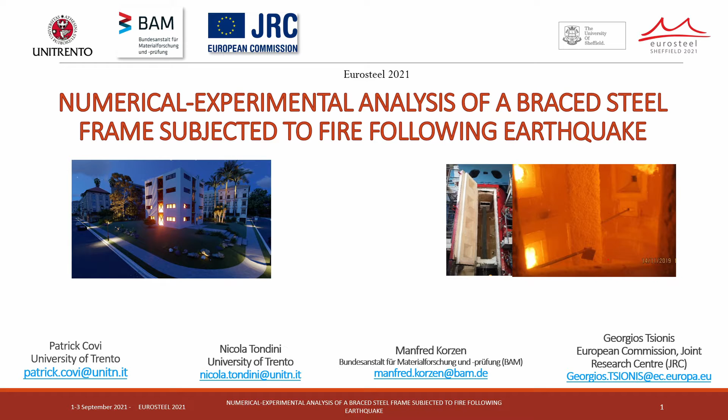In this presentation I will introduce briefly the concept of fire following earthquake, the EQUFIRE project, the concept of hybrid testing, the experimental results, and the model calibration performed using SAFIR and OPENSEES.

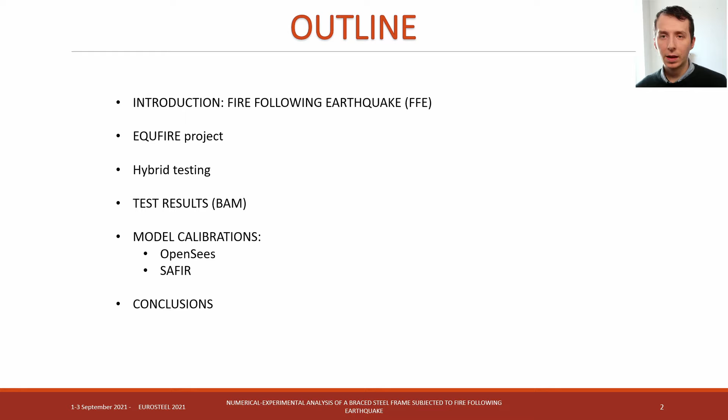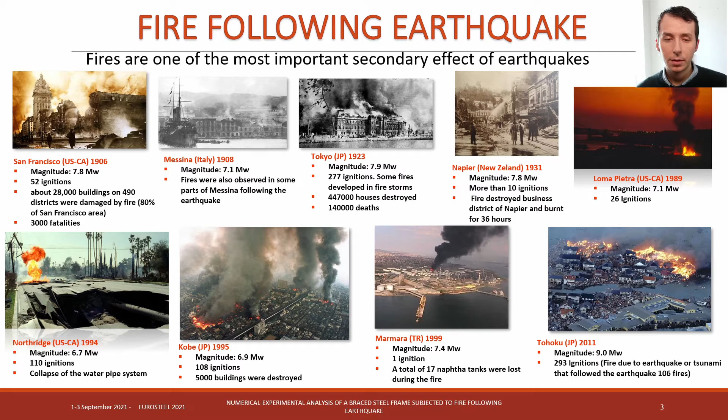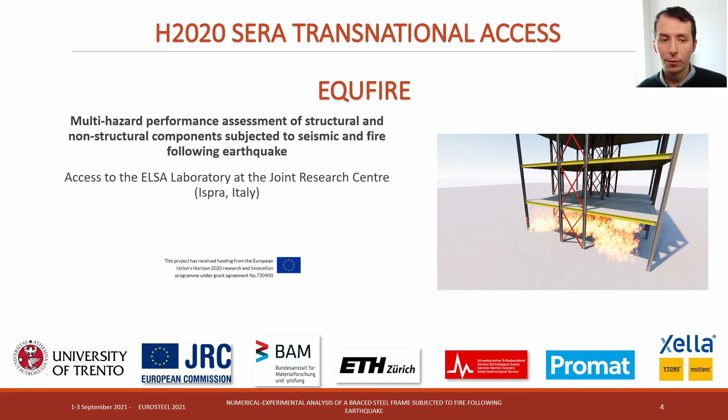I have been primarily involved in different aspects related to the EQUFIRE project that aims to provide experimental data to study the response of structure and non-structural components and the interaction with different fire protection systems to scenarios of fire following earthquake. In particular, a 4-story 3-bay steel frame with concentric bracing in the central bay was selected for the experimental test campaign.

This frame is part of an office building with a square plan of 12.5 meters, located in Lisbon, Portugal, in an area of medium-high seismicity.

The story height is 3 meters, with the exception of the first floor, which is 3.6 meters high, so that it can be tested at full scale in the laboratory.

The columns are continuous and all connections are regarded as pinned. Two different steel grades were used, namely S275 for the braces and S355 for beams and columns. The steel profiles composing the bracing system were oriented according to the weak axis in the plane of the frame.

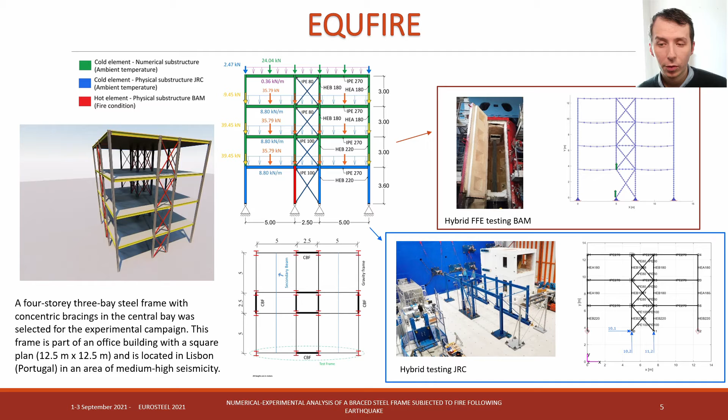Different hybrid fire following earthquake tests of the frame were performed in two different laboratories: one using single columns subjected to fire following earthquake at the furnace of the Federal Institute for Materials Research and Testing BAM in Berlin, that I will present today, and a seismic pseudodynamic test of the real scale 1-story frame at the European laboratory JRC.

The concept of hybrid test is very simple. In fact, we can physically build only the part that we want to study, or some element that is difficult to simulate its behavior, and all the other parts we can reproduce into a simulation in a real-time computer with different techniques.

The experimental tests at BAM were performed using a substructure technique in which the physical column was first subjected to the horizontal and vertical displacement time history computed by a numerical simulation.

Then the column was heated by the ISO 834 standard heating curve, and a constant numerical axial stiffness representative of the surrounding structure was applied as a boundary condition at the top of the physical column.

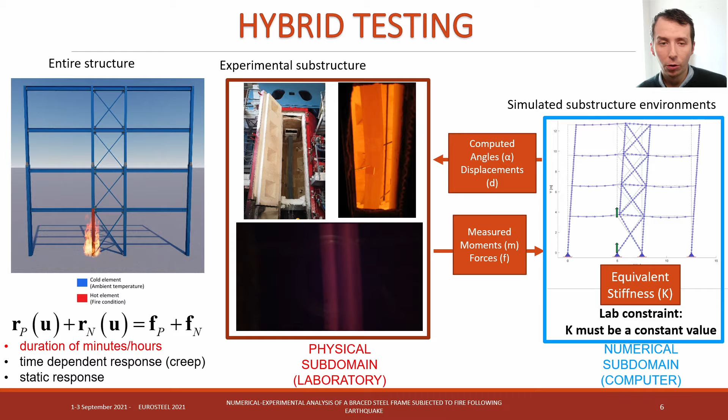In this slide you can see a general view of the fire engineering laboratory at BAM located in Berlin, and the view of the control room of the laboratory and the vertical furnace used during the test campaign.

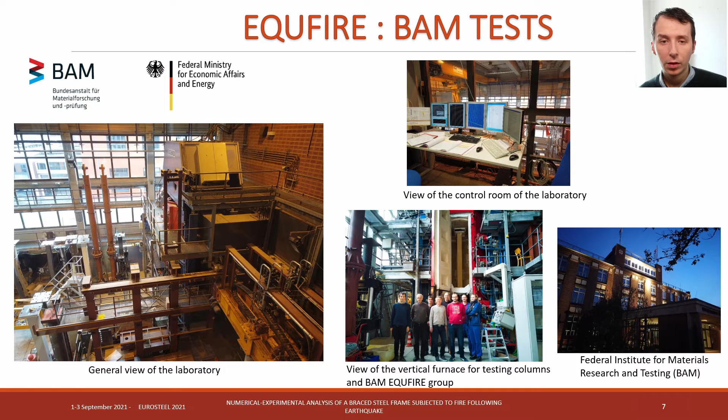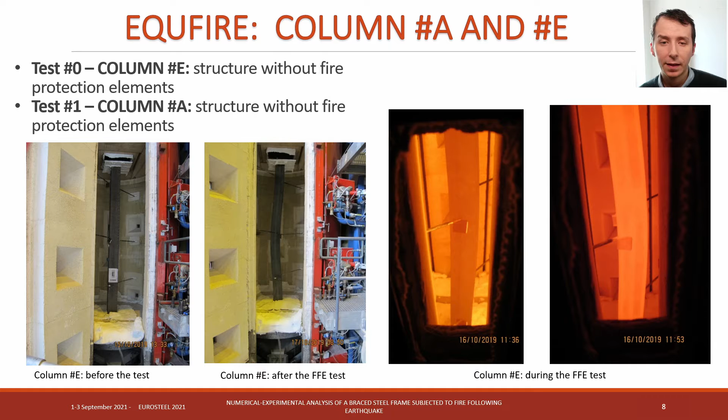In the second test, we tested the column with the fire protection board system, namely Promatect H, and the reinforced joints that are used to connect the boards, designed for seismic regions. The thickness of the boards is 20 mm.

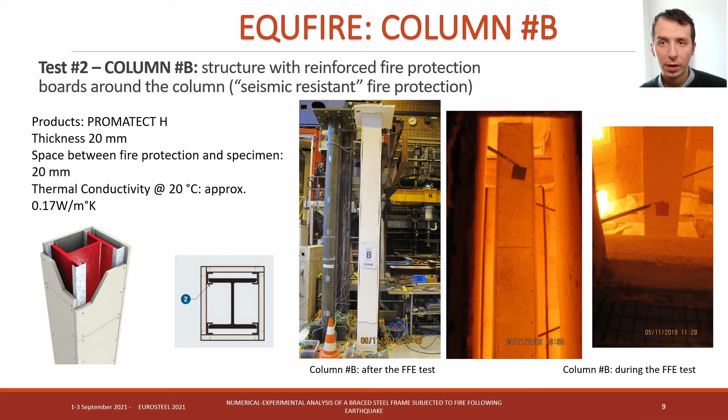In the third test, we tested the column with the same fire protection as the previous slide, but this time with normal joints. Also in this slide you can see other information about the thermal properties of the boards.

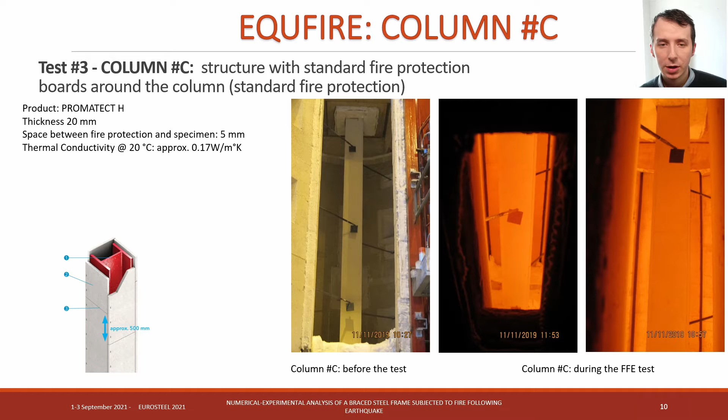In the last test, we tested the column with the fire protection system, namely Promaspray P300, a gypsum-based wet mix spray-applied fire-resistant material designed for application in seismic regions, in which a mechanical reinforcing mesh was placed in the middle of the applied material.

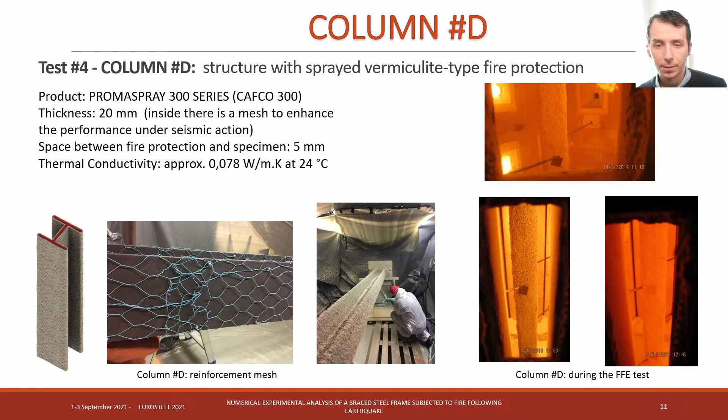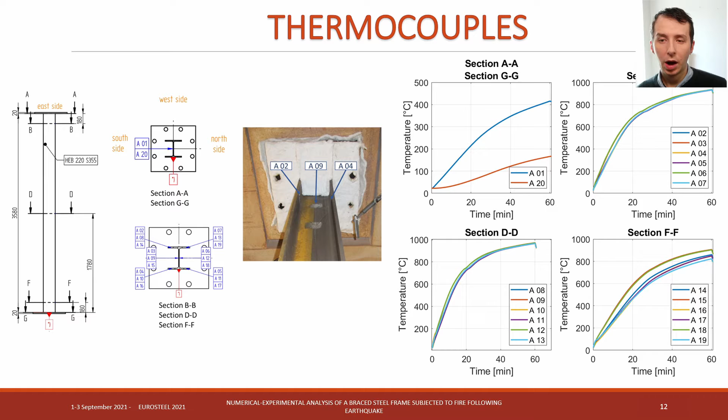The columns were instrumented with 6 thermocouples per section, 4 for the flanges and 2 for the webs, in 3 sections along the height of the column. Another 2 additional thermocouples were placed on the end plates.

15 accelerograms were selected considering the type of spectrum, earthquake scenario, local site condition, period range and ground motion components, using the Engineering Strong-Motion database.

The accelerograms were modified to match the target spectrum in the period range between 0.4 and 0.9 seconds, which includes the fundamental period of the structure.

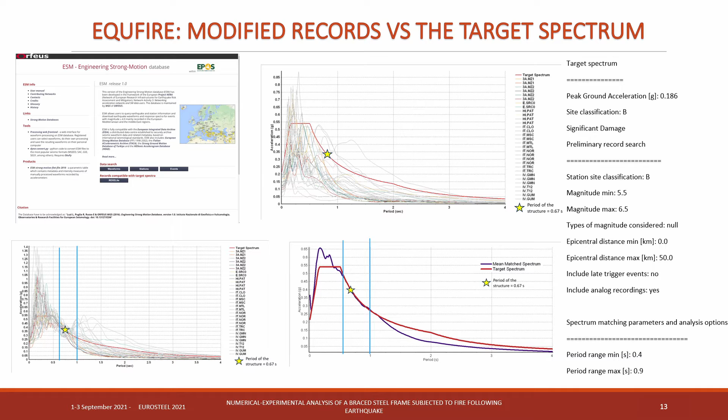Among the 15 accelerograms, the one shown in this slide was selected for the experimental hybrid test and the numerical analysis based on three main requirements.

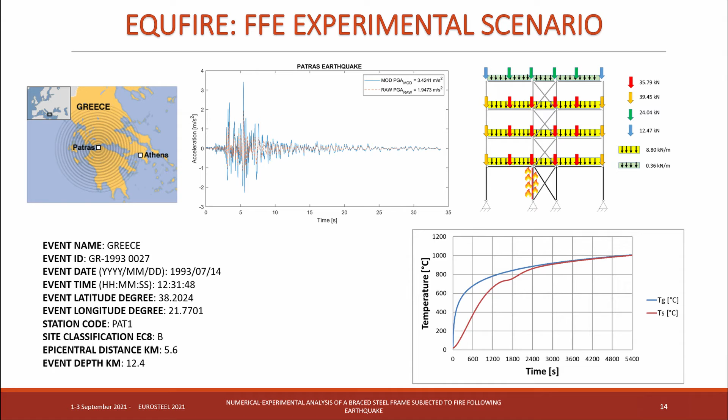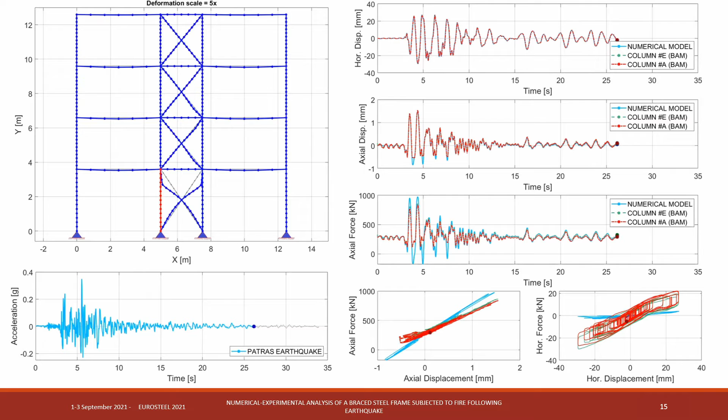In detail, in the upper left part you can see the deformed shape of the numerical model. At the bottom left corner you can see the acceleration. On the right you can see the horizontal displacement and the axial displacement and axial force.

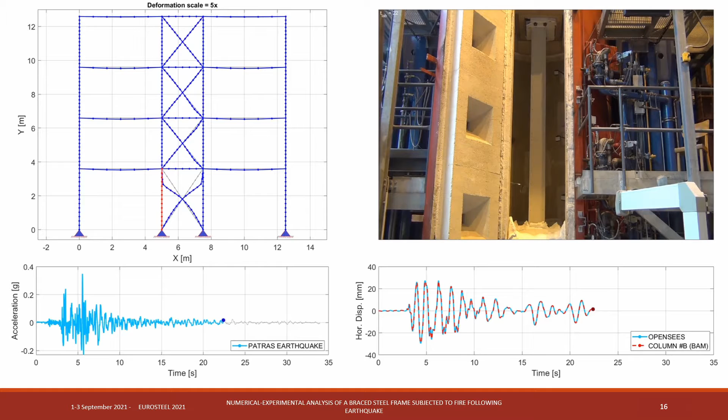In this animation, you can see the comparison between the numerical model, developed before the test, and the experimental test of one column with a gypsum board during the seismic test, before the fire event. On the top right is the video time-lapse of the column inside the furnace during the seismic event, and at the bottom right the horizontal displacement of the column.

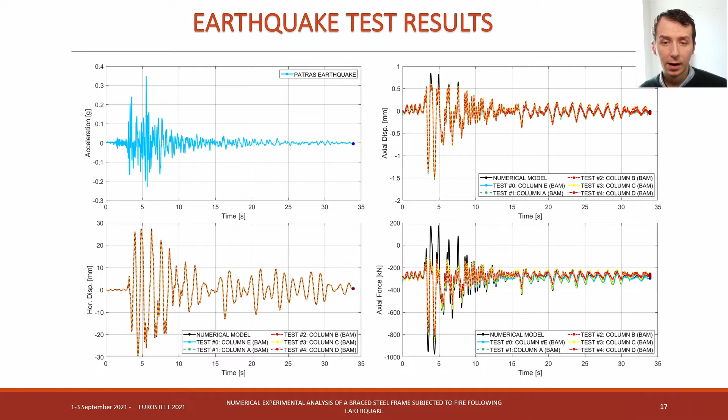This slide shows the comparison of the results of the seismic test and of the numerical simulation in terms of horizontal displacement, axial displacement, and axial force for all tested columns. There is a slight difference in negative axial displacements and forces because the vertical actuator of the furnace cannot apply tension forces to the specimen.

The axial stiffness was numerically estimated by a static nonlinear analysis. The full structure was subjected to gravity loads and to the selected seismogram through a nonlinear time history analysis. Then the physical column was removed and the frame was constrained at each floor to reproduce the boundary condition of the actual experimental setup at BAM. Finally, a monotonic displacement control pattern that continuously increases was performed.

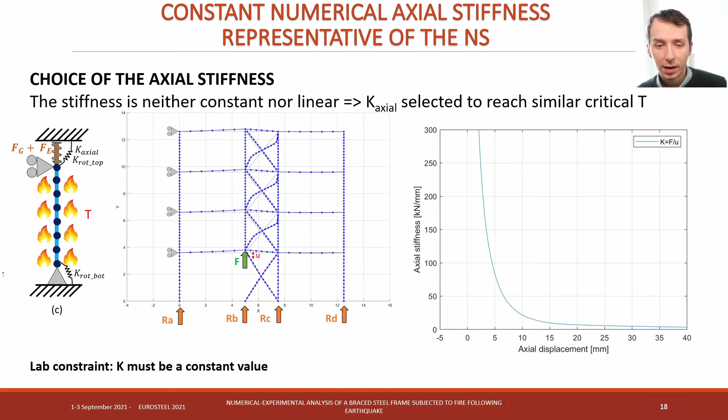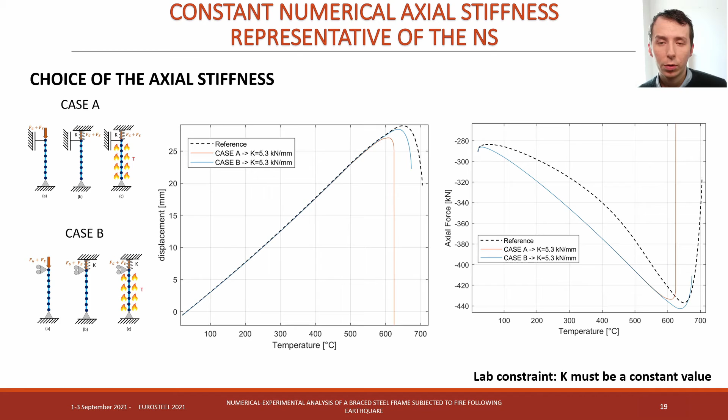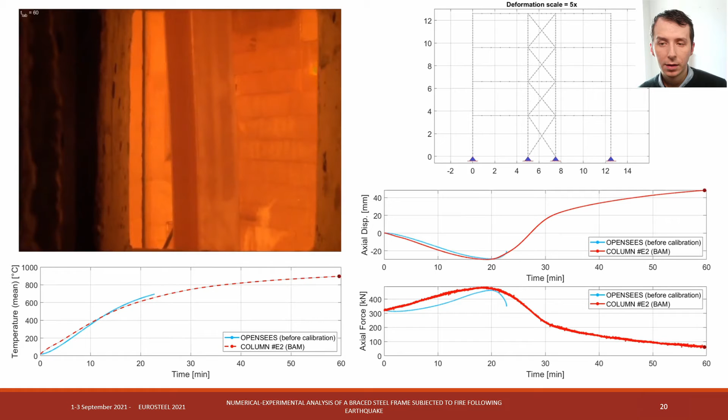The comparison of the test of the unprotected column E and the numerical model before calibration is presented in this animation. At the top left is a video time-lapse of the test, at the bottom left the mean temperature recorded by the thermocouples, at the top right the shape deformation of the numerical model, and at the bottom right the axial displacement and axial force.

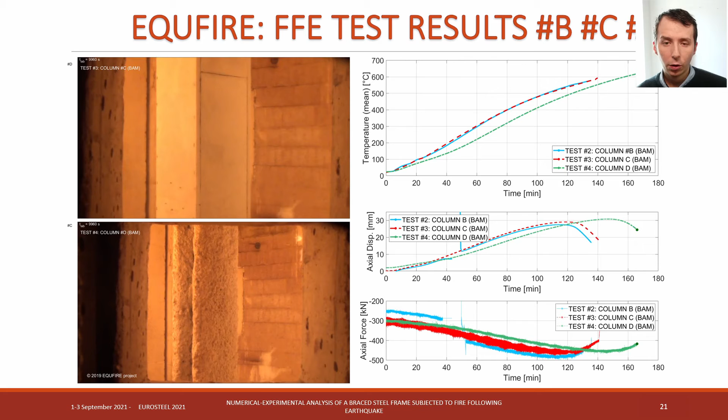This slide presents the comparison of the fire-following-earthquake test on the specimens with the three fire protection systems. Test number 2 on column B was interrupted due to a malfunction of a component and then was restarted. The specimens with the two different fire protection board systems, column B and column C, showed similar performance. The gypsum-based spray material delayed the development of temperature in column D compared to columns B and C.

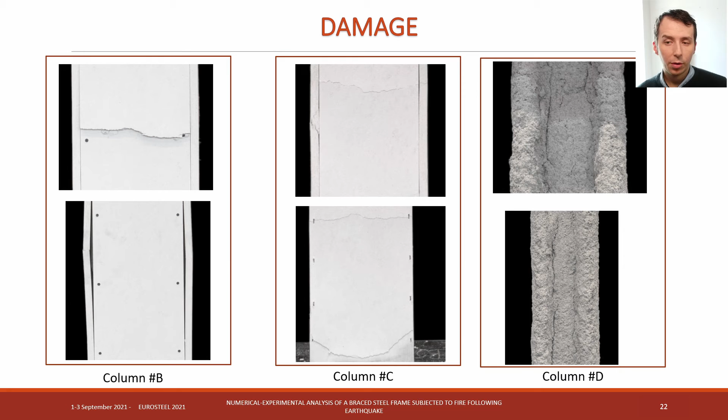As shown in this slide, cracks on the fire protection elements developed due to the combination of seismic and fire actions. However, those cracks were not large enough to compromise the fire resistance of the columns. This was mainly due to the energy dissipation and damage caused by the earthquake being localized in the diagonals of the bracing system rather than in the column, and to the limit of the horizontal displacement that can be applied in the laboratory, which is plus or minus 30 mm.

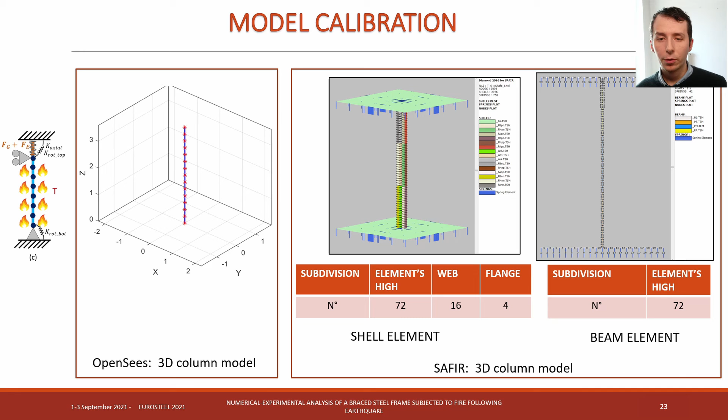Two advanced finite element models more representative of the experimental test were created for the calibration. A 3D finite element model of the column inside the furnace using OpenSees, with 50 nonlinear beam elements based on the corotational formulation, and the constitutive law provided by Eurocode 3 Part 2 was adopted to model the mechanical properties of steel at elevated temperature. Two other 3D finite element models of the column inside the furnace were created using SAFIR, one with beam elements and the other with shell elements.

The calibration of the numerical models consists of three aspects: a rotational stiffness based on the actual type of joint, a more representative temperature distribution, and the real load state after the earthquake event as measured in the laboratory.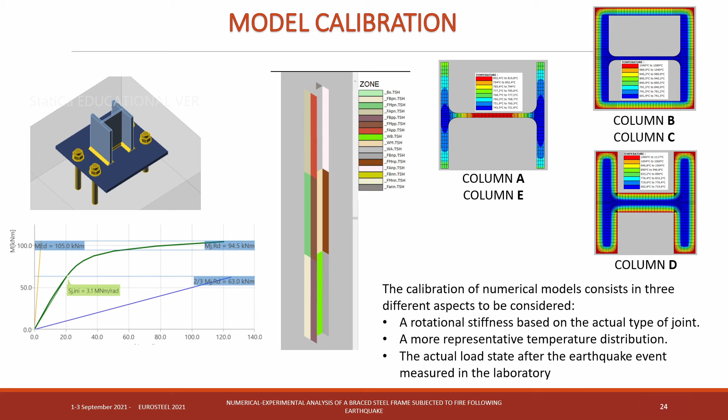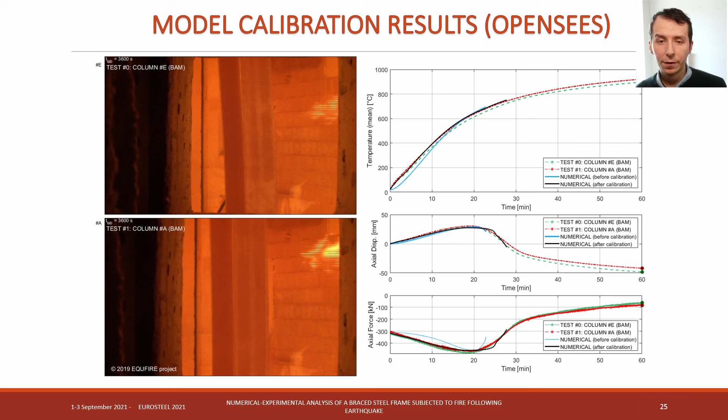This slide shows the comparison of the experimental and numerical results, before and after calibration, using OpenSees for the fire-following-earthquake test on columns A and E without fire protection, in terms of the evolution of mean temperature, axial displacement, and axial force. The comparison after calibration demonstrates good agreement.

Here are the results of different models developed in SAFIR, starting from the unprotected column A. The blue curves refer to the beam and shell models without taking into account any axial and rotational springs. The green curves show results with an axial spring value simulating the stiffness of the rest of the structure, and the red curves show results that also account for the rotational stiffness of the base and top connections.

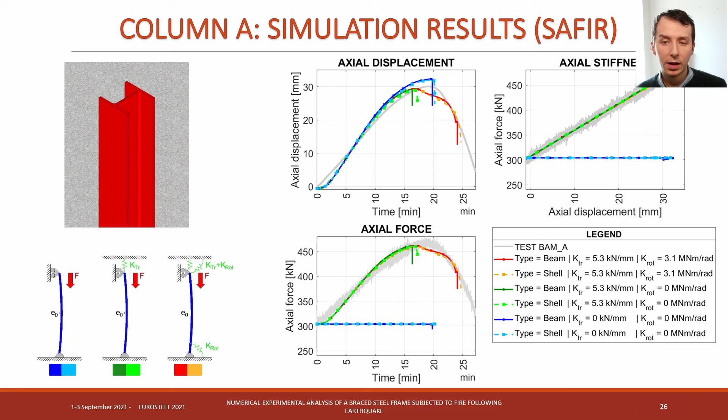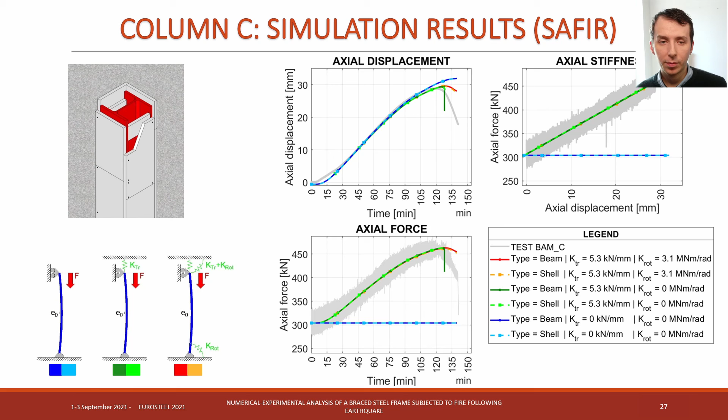Here are the numerical calibration results of column C as an example of the fireboard protection system, in terms of axial displacement, axial stiffness, and axial forces. In this other slide you can see the numerical calibration results of column D with the gypsum-based sprayed protection system.

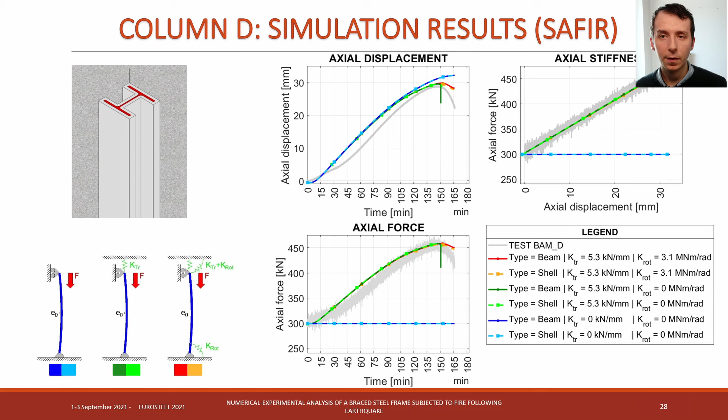The comparison between the numerical analysis and the experimental results for the columns demonstrated good agreement for both seismic and fire actions. No serious damage was observed that would undermine the fire resistance of the columns. More significant damage to the fire protection of the dissipative elements of the bracing system is expected during the fire-following-earthquake test series at the JRC laboratory.